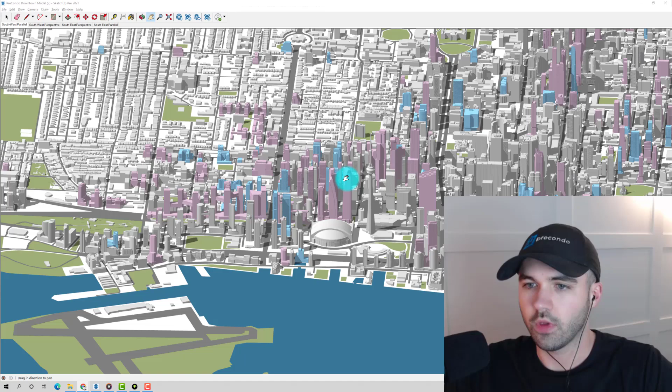Alrighty, today we are talking about Orca.

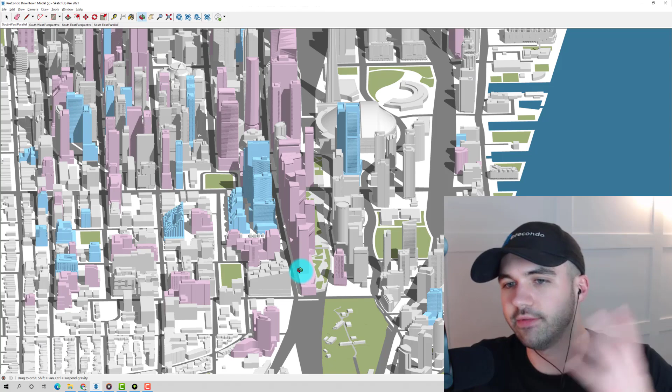So if you're not familiar, Orca is the project replacing the rail deck park at Front and Spadina, on the south side of Front, from Bathurst all the way over to Spadina and even over to Blue Jays Way. You are getting 9 buildings, 7 residential, 9 in total. 2 will be commercial buildings directly across the street from Tridel's The Well.

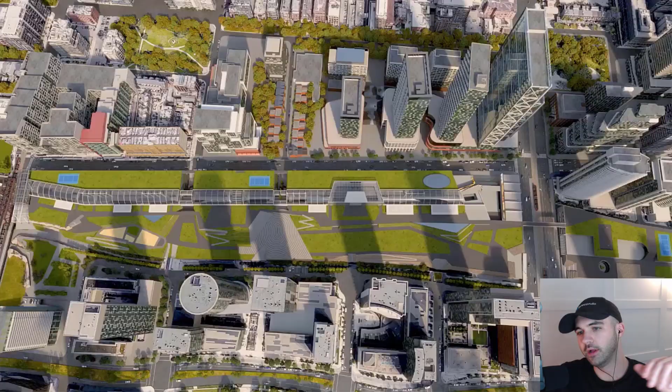So if you're not familiar, this is a 21-acre site. The initial plan was for it all to be parkland, just the rail deck park built over top of the rail corridor there, the hideous rail corridor. But obviously the City of Toronto can't afford it, so a developer is stepping in and paying the piper.

I actually like this proposal. I think it's a win-win. So this is a proposal from Fengate Craft Developments and Kingsmen Group. I may be forgetting some other developers.

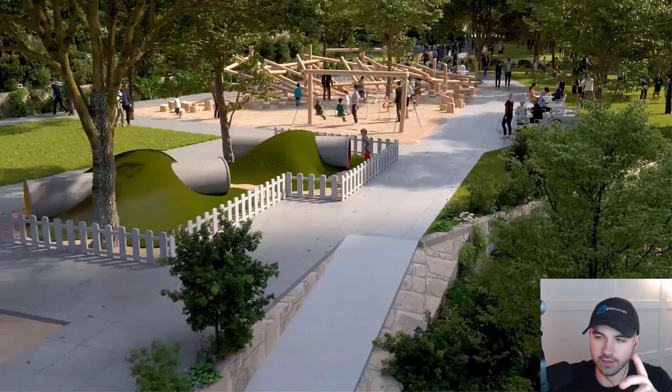Moving on, so we're right here, obviously, above the rail corridor. You guys know it, if you're from Toronto you see it all the time. The initial plan was just for 21 acres of public parkland. And to give you perspective on that, 21 acres is roughly the size of 16 football fields, and it would have been entirely parkland, no residential, no condos, no commercial space.

But look, the 2017 estimate in total price to do this was $1.5 billion. We can't afford it. In total, we have $400 million in our parkland reserve. So at the time, that's what we had.

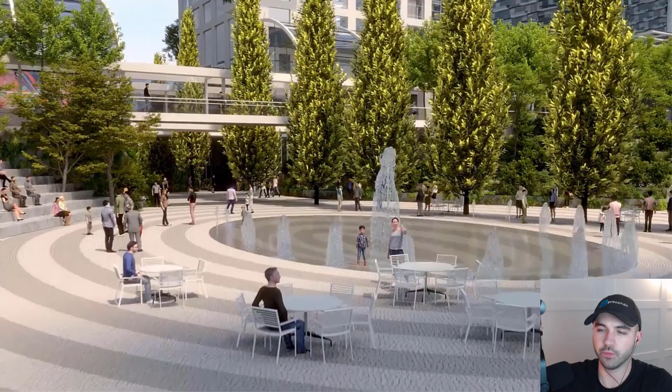And if you're not familiar, when you're building a condo building in Toronto, the City of Toronto is going to say, hey, you also have to build a park. But obviously, most of the time you're buying a half-acre parcel of land, there is no room for a park. So they say, okay cool, instead you're going to give us cash in lieu. So the developer will fork over, on average, $16,000 per unit. The city puts it in a fund and is going to use that fund to build parkland in the future.

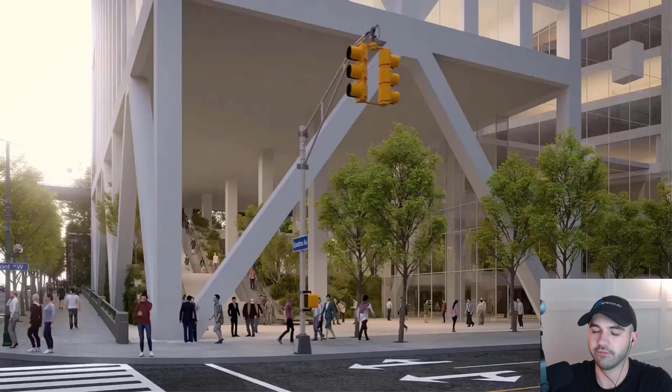We only had $400 million at the time. The cost estimate on the rail deck park was $1.5 billion. So we couldn't do it, right?

I think this is a win-win because the developer's going to step in and pay for 12 acres of park. So instead of 21 acres, we're still getting over 12 acres of parkland. And we're a city, obviously, with a massive housing shortage, and they're going to bring us 2,750 units.

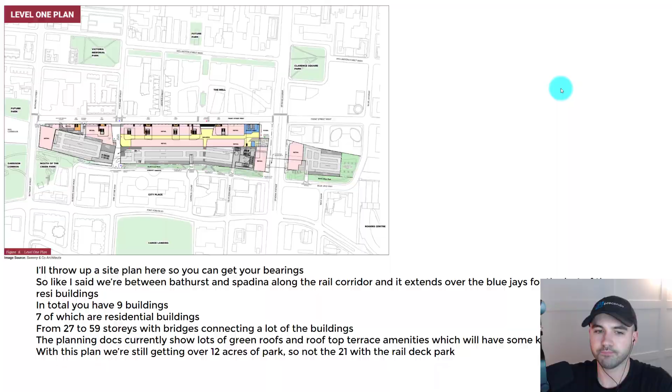So I'll throw up the site plan here so you can get your bearings if you don't already know where we're at. Like I said, south side of Front Street along the rail corridor, all the way from Bathurst to Spadina, and then a little parcel of the development over on Blue Jays Way. In total, you have 9 buildings, 7 of which are residential. The 2 commercial buildings will be on either side, the east and west side of Spadina here, and the rest will be residential, ranging from 27 to 59 stories.

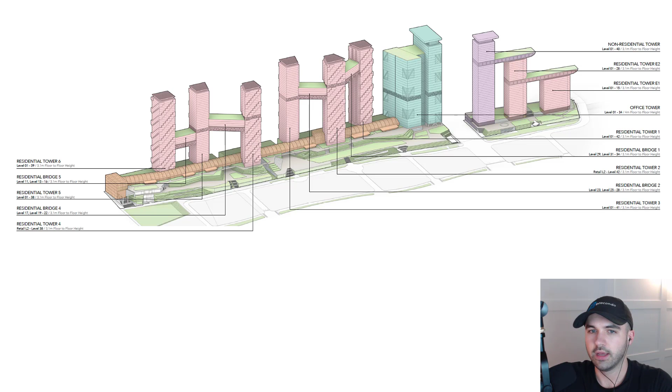And the current proposal and the current plan is actually pretty unique. So a lot of the buildings have connecting bridges between them with outdoor amenities and green roofs, so you're going to get some killer views from up there, some really nice outdoor private amenity space. And like I said, we're still getting 12 acres of park. So still the majority of the parcel of land is going to be parkland, publicly available parkland with atriums, tons of seating areas, running trails, walking trails, these beautiful cliffs, and all this landscaping.

So I really like the proposal. In fact, I'll say it, I like it better than the 21-acre public park. Why? Well, number one, I get to sell them, right? So I'm a pre-construction broker. So I'm an incredibly biased person to take an opinion on this site.

We have a housing shortage in Toronto, that is no secret, we need more residential units. This brings 2,750 residential units into a relatively dead piece of land. So the rail corridor is hideous, we needed to do something with it. Rail deck park, we can't afford. And this is a really good compromise, right?

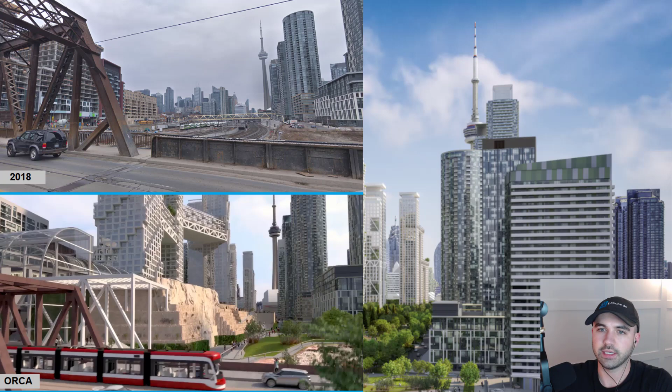And it's worth noting, they're also proposing a GO station here, the Spadina GO station. I mean, you're at Front and Spadina, so you're really not, you're close to transit anyways, but it's nice to see that there's a transit component with the proposal as well. Like I said, you have 7 residential and 2 commercial buildings.

2,750 units in total. Now, 550 of those residential units are going to be affordable rental units. So this brings some affordable housing to the city as well.

If you're not familiar, people ask me all the time, well, what constitutes affordable housing? So it'll be based on 80% of CMHC's market average rent. That puts a 1-bedroom currently at $1,100 a month, so considerably below market rent. So they are very affordable, provided you can qualify for the program.

And then for the rest of the saleable units, they've actually got an interesting unit composition proposed. So 825 1-bedrooms, 1,100 2-bedrooms, and 825 3-bedrooms, which is a lot, in my opinion, of 3-bedrooms.

If you're not familiar, the City of Toronto currently requires any pre-construction condo development to reserve 10% of the units for 3-bedroom, or as they call it, family-sized units.

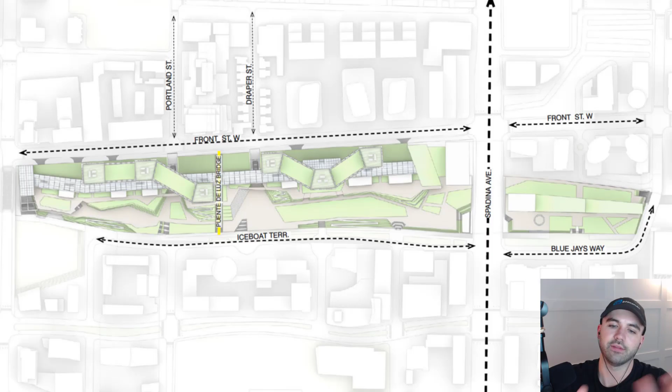And given the fact that people buying a condo building that's not going to be ready for 5, 6, 7, even 8 years, they tend to skew heavily to the investor side of the market. Because end users, downsizers, first-time home buyers, upsizers, they're traditionally looking for something ready a lot sooner. So unless you're buying this for your kids down the line, the people who fund these developments are essentially investors. They buy from the developer day one, building closes in 8 years, some of them start to sell, and end users start to pick up those units, and the building demographic changes from heavily investment over time to become a more homeowner-driven building. That's just how buildings mature over the years.

It'll be interesting to see how the market absorbs all those 3 bedrooms.

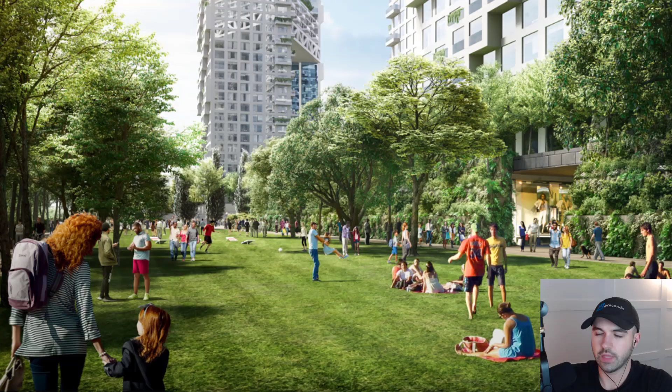Now I'll throw up some renderings of the public parkland. You have a lot going on here.

My only beef with them, and I've seen it mentioned on Twitter, is there's a lot of stairs. We're very heavily elevated from street level here, so there's tons of stairs and it's multi-level. I think that could actually be a good thing. I don't have a problem with stairs, but from an accessibility standpoint, I'm sure it's probably going to be a mess. But look, I'm a realtor, I'm no urban planner, so maybe just disregard that opinion. I probably don't know what I'm talking about.

But there is an atrium, there's tons of seating areas. I think it's going to be a really well-utilized parkland. And of course, it all connects to the commercial, or rather the retail, at street level. So it's going to be a really interesting place to hang out.

You're looking at 12 acres of it, running trails. You've even got this cliff that they rendered at the Bathurst side of the project. Now, the cliff rendering does have people rock climbing without ropes or harnesses, so they must have just incredible grip strength, but I digress.

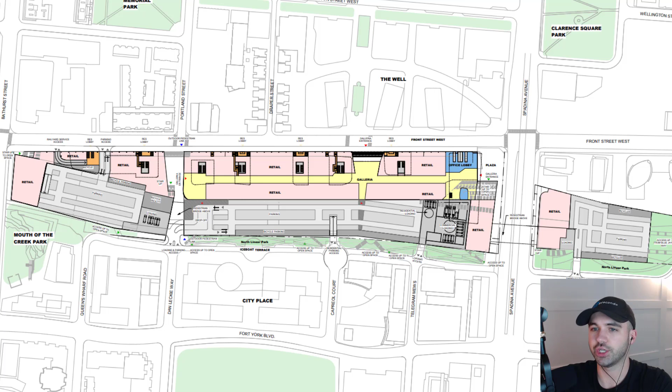So in terms of retail, I'll throw up the ground level plan here. You've got a ton of 2-story retail on the ground level, 62,000 square meters. So just shy of 700,000 square feet of retail space.

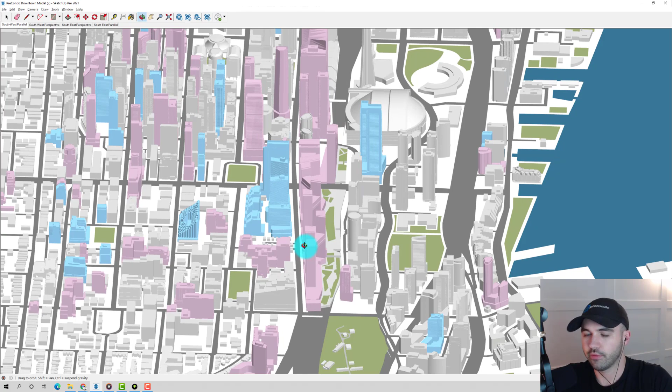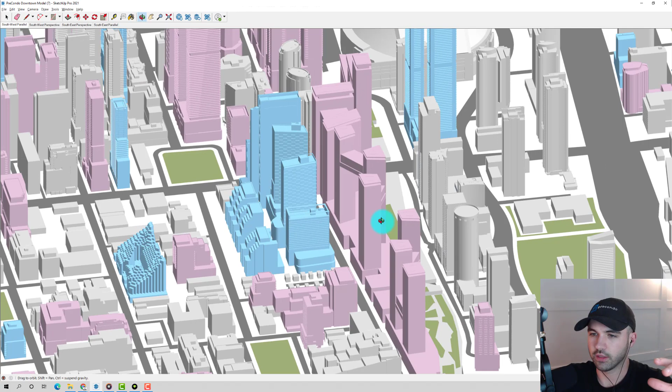And remember, this is directly across the street from Tridel's The Well. So Orca's here, in pink. If you haven't seen this model before, pink is proposed and blue is under construction. And then Tridel's The Well is right here. Both of them have this open air but covered galleria retail along the ground level, and they're directly across from each other. So the entrance to the galleria for Orca's there, and the entrance to the Well's is right over here, directly across the street.

So you've got 700,000 square feet on the Orca side and another 400,000 square feet of retail on Tridel's side. If that doesn't mean anything to you, Shops at Don Mills is 500,000 square feet, Eaton Centre's 2 million square feet. So combined between the Well and Orca, you have 1.2 or 1.3 million square feet of retail space.

So it's just a ton of retail space in this pocket, going to really almost move King West a little closer to Spadina. It should be interesting to see how that plays out. I'm looking forward to it. It's bringing a ton of amenities to the buildings, to City Place as well.

And additionally, you have another 80,000 square meters of commercial office space in the office building. So tons of employment will be housed in this area, and tons of residential as well. Like I said, it's like having a giant master plan community in the middle of the city. I really like it, I think it's a unique proposal.